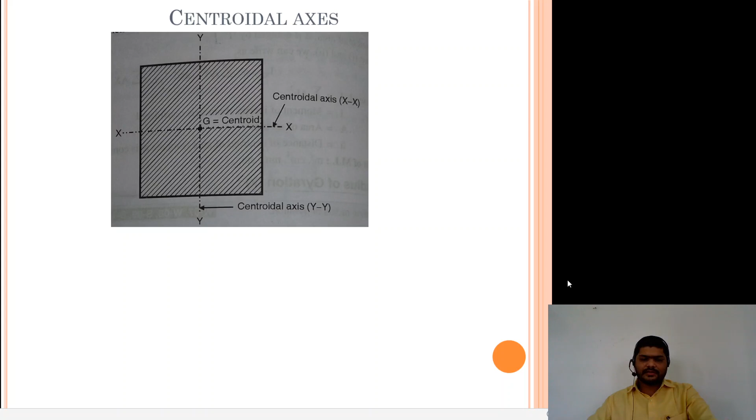The axes which are passing through the center of gravity or center of section are called as centroidal axis.

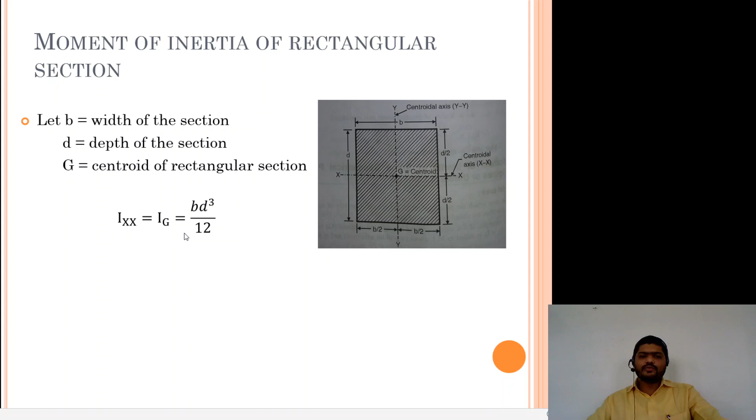So moment of inertia for rectangular section means Ixx is equal to Ig is equal to BD cube divided by 12, and Iyy is equal to Ig is equal to DB cube divided by 12.

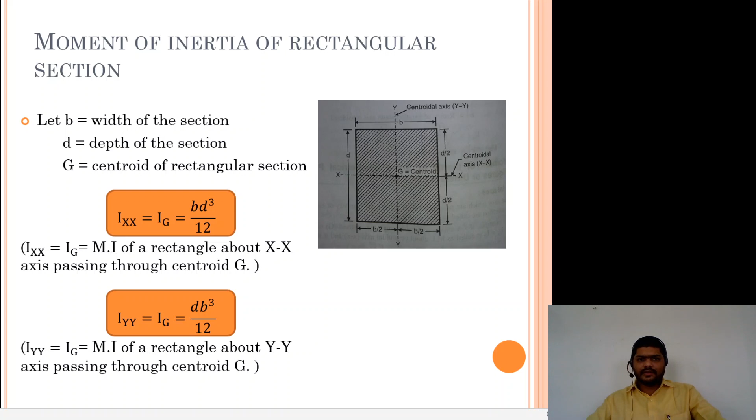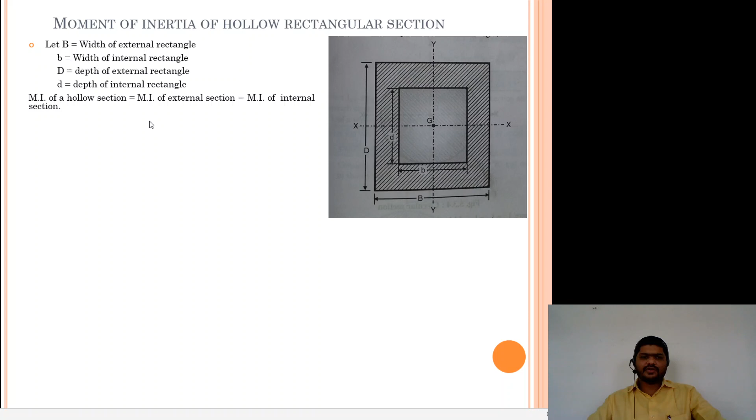So what is the moment of inertia for hollow section? The moment of inertia for hollow section is equal to moment of inertia of external section minus moment of inertia of internal section. So we can write Ixx is equal to Ig is equal to capital BD cube divided by 12 minus small bd cube divided by 12. So we can write 1 by 12 in bracket BD cube minus bd cube.

Similarly, we can write Iyy is equal to Ig is equal to capital DB cube divided by 12 minus small db cube divided by 12. So we can write Iyy is equal to 1 by 12 in bracket capital DB cube minus small db cube.

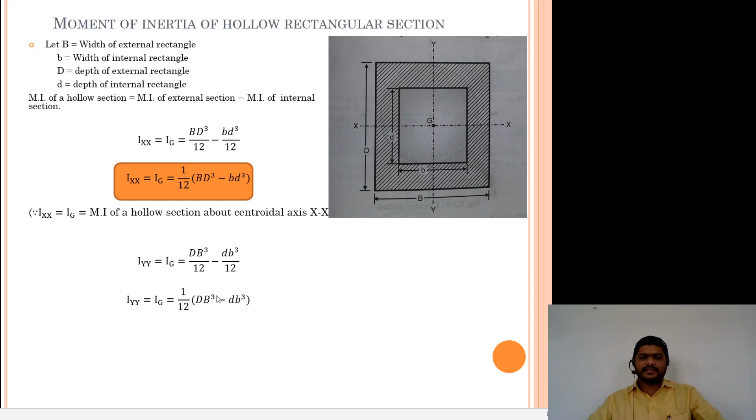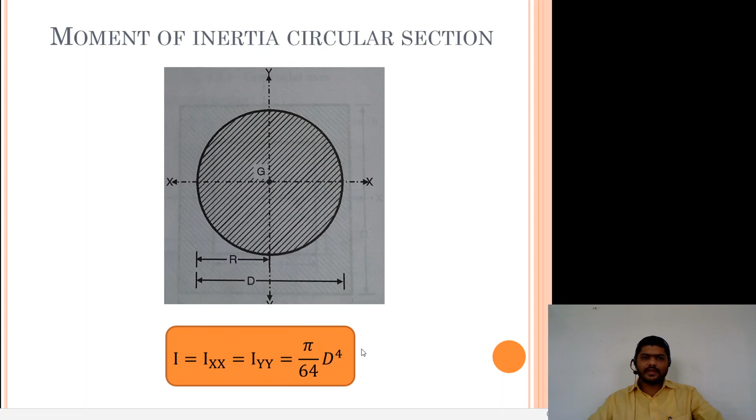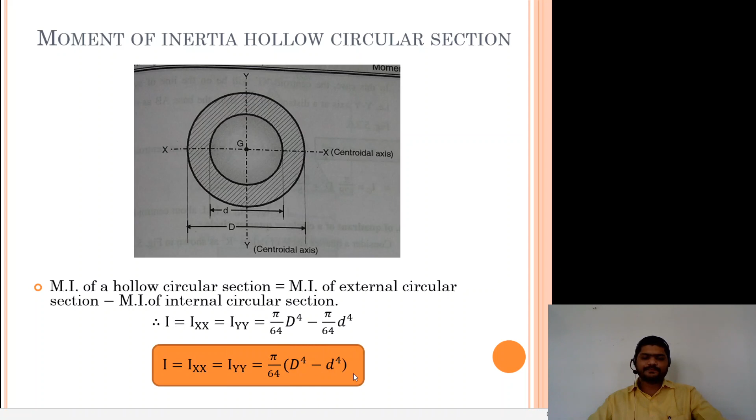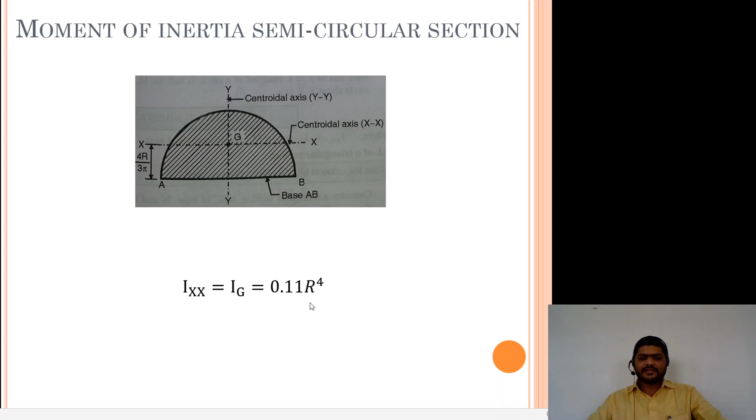The next section is moment of inertia of semicircular section. D is the diameter of this circle. The formula is Ixx is equal to Ig is equal to 0.11 r raised to 4, and Iyy is equal to pi by 128 d raised to 4, or we can write pi r raised to 4 divided by 8.

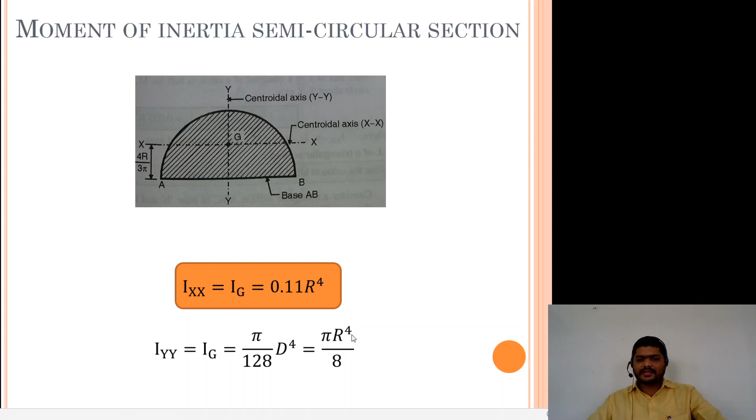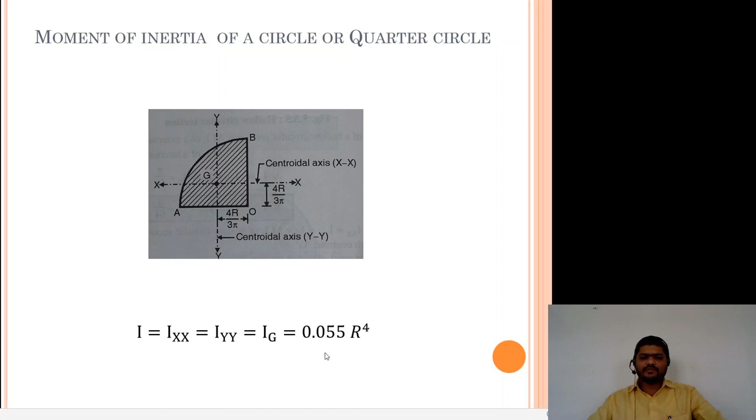Next section is quarter circle. Moment of inertia of a quarter circle: I is equal to Ixx is equal to Iyy is equal to Ig is equal to 0.055 r raised to 4.

Next, moment of inertia of triangular section. At centroidal axis, Ixx is equal to Ig is equal to bh cube divided by 36. Here b is the base and h is the height of the triangle. IAB is equal to bh cube divided by 12. IAB means moment of inertia at base of triangle.

Next, I apex is equal to BH cube divided by 4. At apex, moment of inertia of triangular section, I apex is equal to BH cube divided by 4.

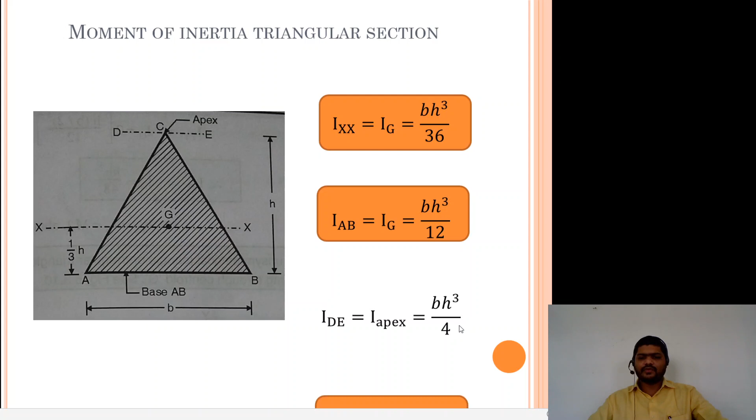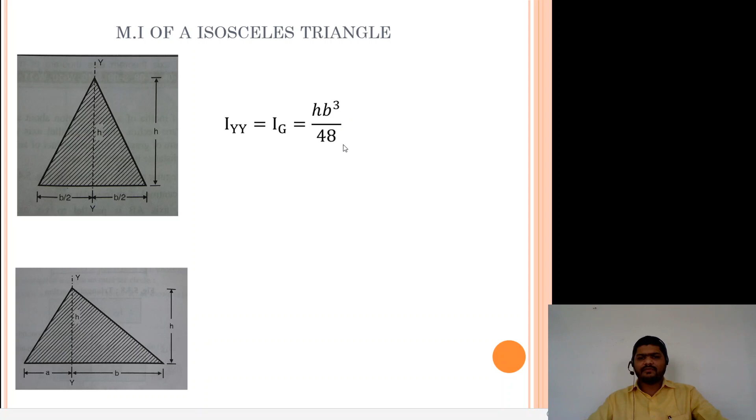Next section is moment of inertia of an isosceles triangle. The formula for Ixx, I base and I apex is same, but Iyy is equal to Ig is equal to HB cube divided by 48.

The moment of inertia of unsymmetrical triangle: Iyy is equal to HA cube divided by 12 plus HB cube divided by 12, is equal to H by 12 in bracket A cube plus B cube. So these are all formulas of moment of inertia for different sections.